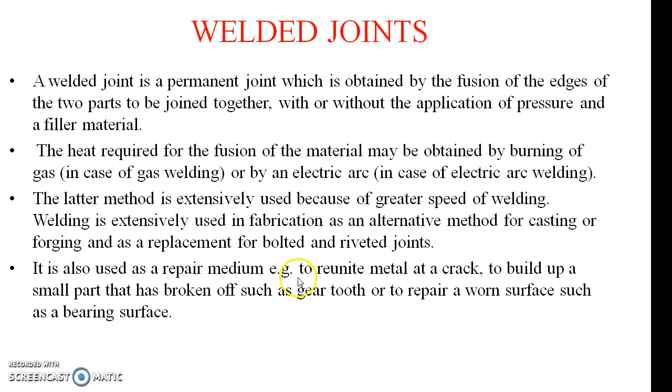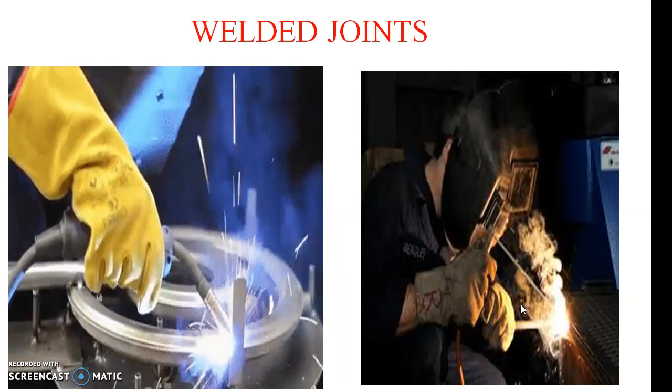So next is our welding process. So what are those welding processes? The welding process may be broadly classified into the following two groups. Those are two groups according to our factors. I have already said that the welding process has two important factors,

one is heat and another one is pressure. So welding processes that use heat alone, that is fusion welding, or welding processes that use a combination of heat and pressure, that is called forge welding. Here in fusion welding there is no requirement of pressure. Without pressure we can weld those materials and join them together. But in forge welding the combination of pressure and heat is both required. So the types of welding are, one is fusion welding and another one is forge welding.

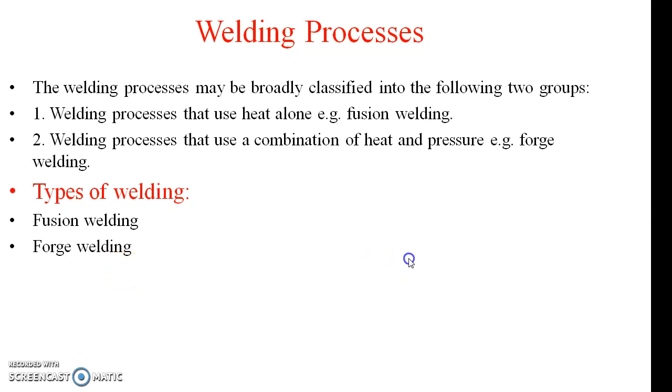So first of all, what is fusion welding? We know what fusion is. Fusion means the temperature. So here, in case of fusion welding, the parts to be joined are held in position while the molten metal is supplied to the joint.

The molten metal may come from the parts themselves or filler material, which normally has the composition of the parent metal. Here the filler material also means the molten metal, but we are taking the filler material separately or specifically. But the filler material should be the same composition as the parent material. The parent material means those materials which we have to join together. So the filler material or the molten metal, you can say the filler metal, should have the composition of that material also.

So the next point is the joint surface becomes plastic or even molten because of the heat. Fusion welding at 245 degrees Celsius produces permanent molecular bonds between sections. Welded joints 343 from the molten filler metal or other source. Thus, when the molten metal solidifies or fuses, the joint is formed.

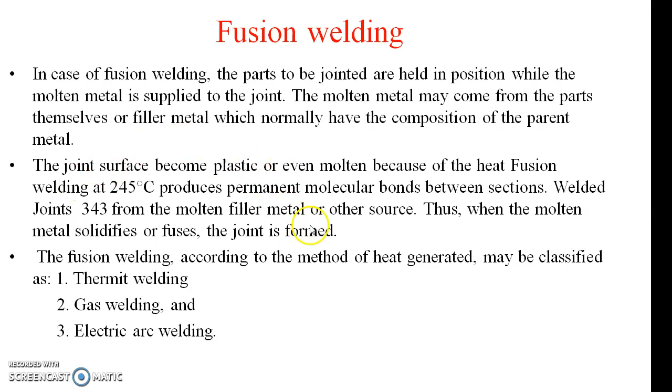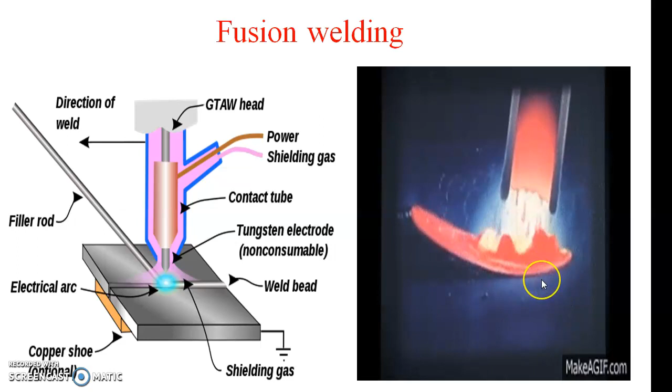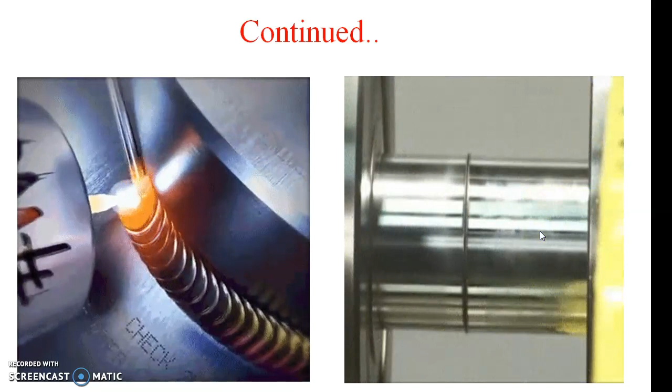See, this is a small video of fusion welding where there is no pressure requirement in this welding process. See, those are the welding joints, and this is the filler material. But in this video there is no filler material we are using. Sometimes the parent metal is the filler material itself. See, here the molten metal comes and joins together. But here we have to take a filler material specifically.

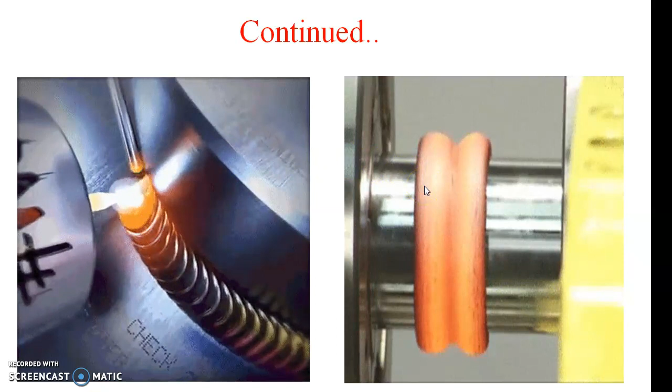So next is, what is thermit welding? This is also a type of fusion welding. That was the first type of fusion welding, called thermit welding. In thermit welding, a mixture of iron oxide and aluminum called thermite is ignited and the iron oxide is reduced to molten metal. Here thermite means a molten metal or a filler material. So the molten iron is poured into a mold made around the joint and fuses with the parts to be welded.

A major advantage of thermit welding is that all parts of the weld section are molten at the same time and the weld cools almost uniformly. This results in minimum problems with residual stresses.